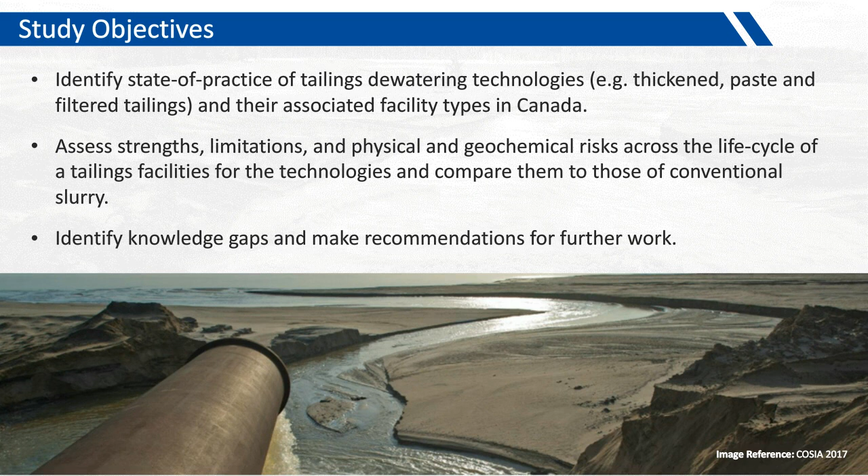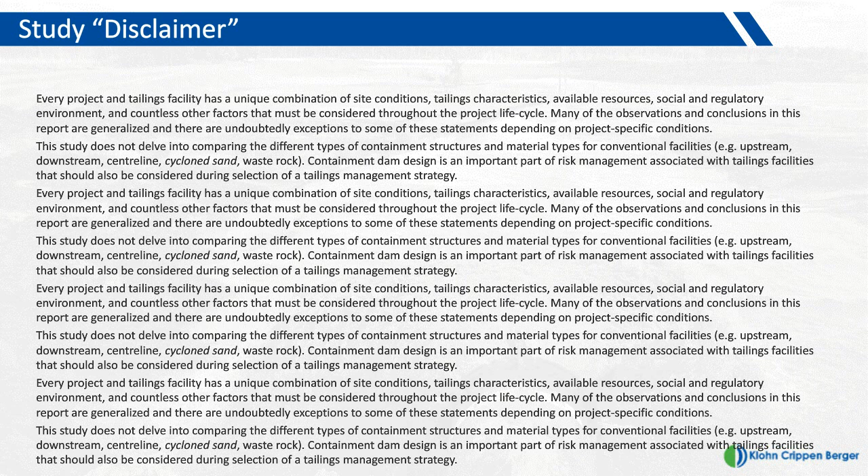As with all high-level studies, we have a long list of disclaimers, which really just boils down to: conclusions are generalized. Undoubtedly, there will be exceptions, and the scope of the study does not cover everything, in particular dam design and closure design that is unrelated to tailings dewatering. And we also are focusing on surface tailings facilities and not underground disposal of tailings.

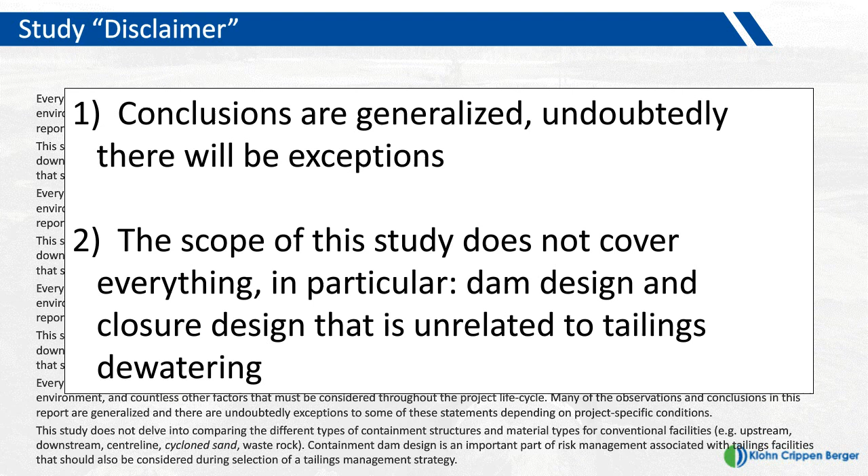The study methodology took 3 main steps. First, we are looking for the current state of practice in Canada, and we did that through literature review, database research, and a questionnaire to all Canadian mines. Then we looked at comparing the dewatering technologies and facility types and how they compared to conventional tailings management. And this third step was to identify lessons learned and knowledge gaps.

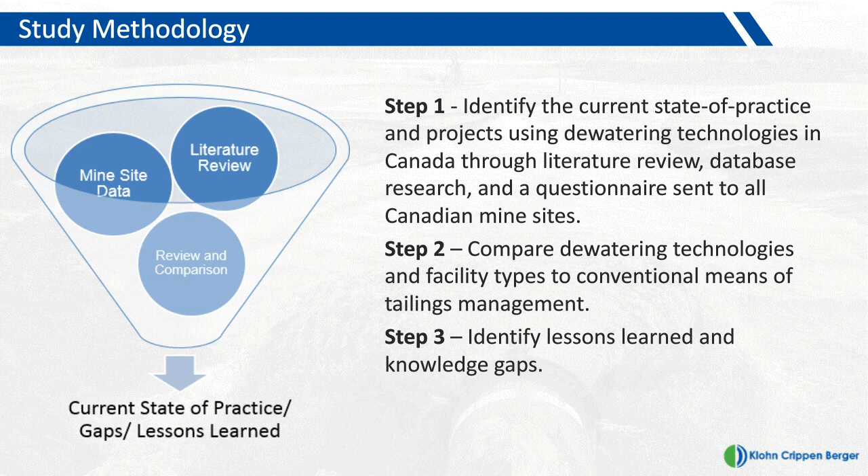No one-size-fits-all tailings technology for tailings management. Although this slide appears comical, it is an important concept from our study. Tailings management boils down to risk management and should be focused for the life cycle of the facility, especially post-closure. Tailings management strategy should be risk-based. Therefore, the tailings technology selected should consider the risk profile of all alternatives and implement the strategy that best manages all risks.

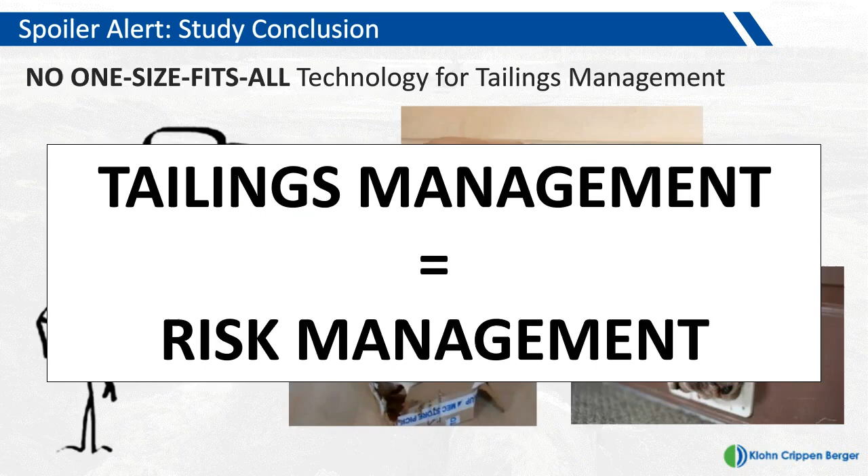Our presentation objective today is to give you a brief overview of the study and present our key learnings through the case histories. Now we're going to get into some of the details of the tailings management strategy considerations and what we uncovered during this study.

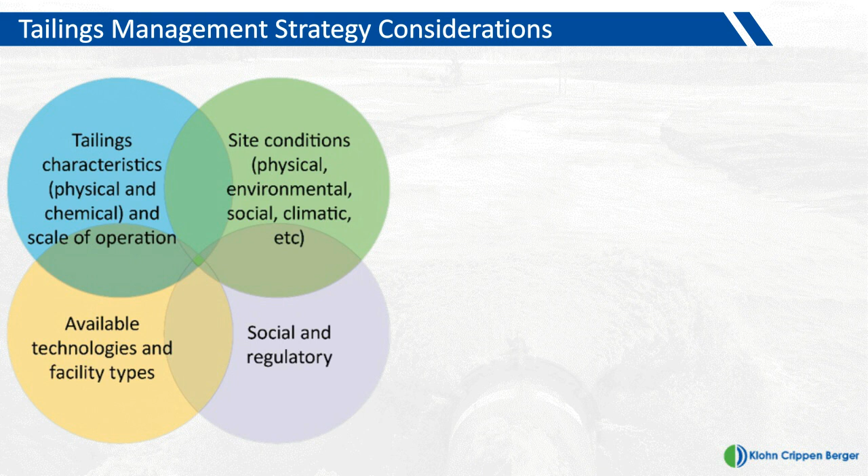We looked at tailings management strategies from 4 different perspectives: the tailings characteristics, the site conditions, the available technologies and facility types, and the social and regulatory environment. For this presentation, we're going to focus on 3 key areas: tailings characteristics and scale, available technology and facility types, and site conditions, which will encompass to some degree the social and regulatory environment of your site location.

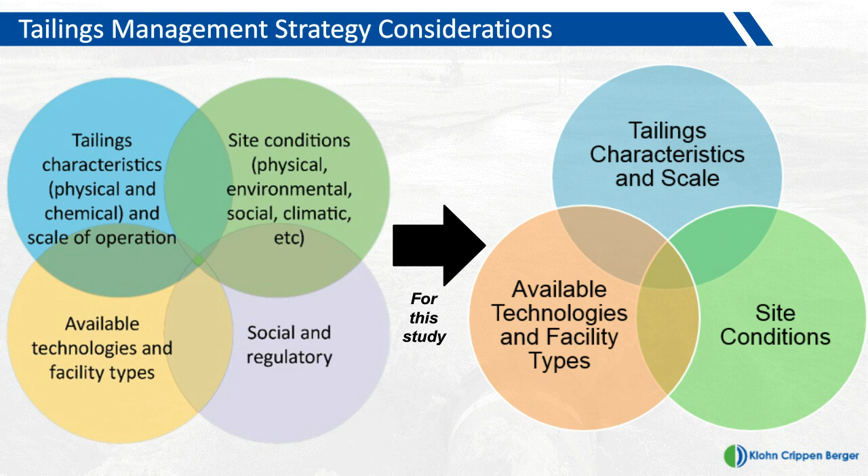You want to be somewhere in the middle of this Venn diagram. Your goal should be to minimize the short-term and long-term risks of the facility. All the key aspects should be evaluated: tailings characteristics, including both physical and chemical characteristics, what is available to you in your region, as well as the site conditions you're dealing with, and presumably the objective you're working towards for the tailings technology.

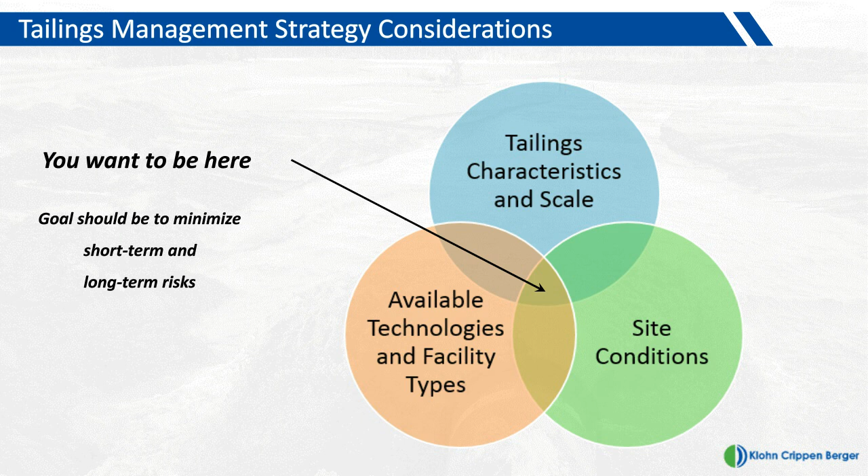When we start with characteristics and scale, we're going to talk a little bit about physical properties, so the grain size, the rheology and plasticity of the tailings, the chemical properties of both the solids and the water that you're containing in the tailings facility, and your mill production rate and anticipated throughput. Because as you'll see later in our presentation, not all available technologies are scalable.

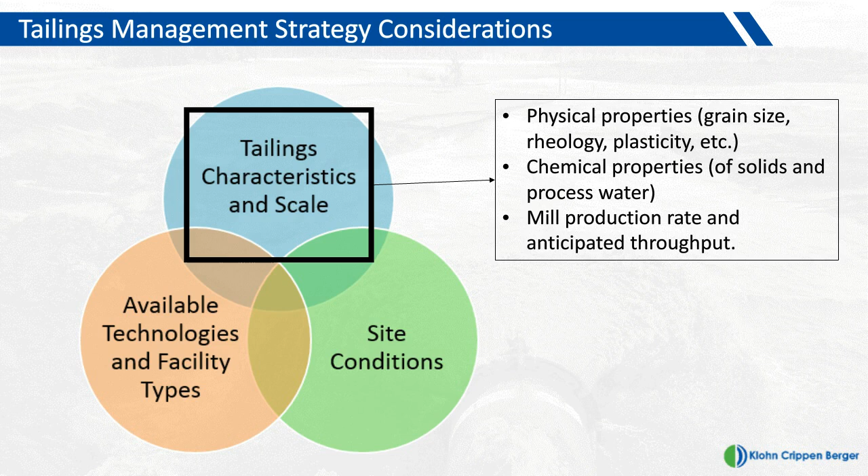Now I'm going to talk about physical tailings properties. What you're seeing on the slide here is the ICOLD 2017 classification system for tailings, and this is what we applied throughout the tailings technology study. The tailings are classified according to their particle size distribution and Atterberg limits. You'll see here we have several tailings types, ranging from coarse tailings to hard rock, altered rock, fine, and ultrafine tailings.

Iron and base metal tailings are typically characteristic of the coarse and hard rock tailings ranges. When we get into gold and polymetallic deposits, you can sometimes see them crossing the altered rock and fine tailings boundaries. When we talk about our case studies later, we'll get into some of the details for those specific studies and their tailings properties.

Kate's going to discuss tailings properties later on in the presentation as it relates to application to technology types. But here I want to emphasize the importance of tailings characteristics and classification prior to tailings technology selection. We're using this classification system for particle size and Atterberg limits, including the fines content of the tailings, the plasticity index, and the liquid limit to help understand whether or not your tailings are appropriate for different technologies.

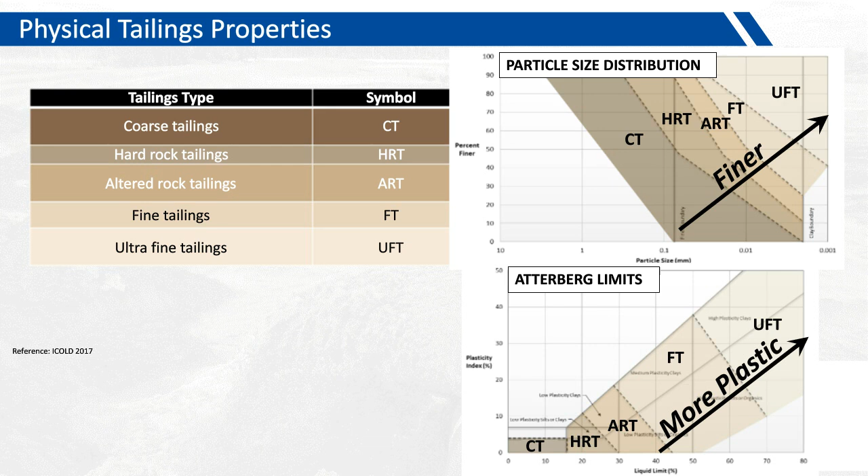When we consider the chemical properties of the tailings, I'm going to point you to the reference from the GARD Guide. This was developed by INAP in 2009, and it's a general classification and characterization program for the metal leaching and acid rock drainage properties of tailings and other geologic materials.

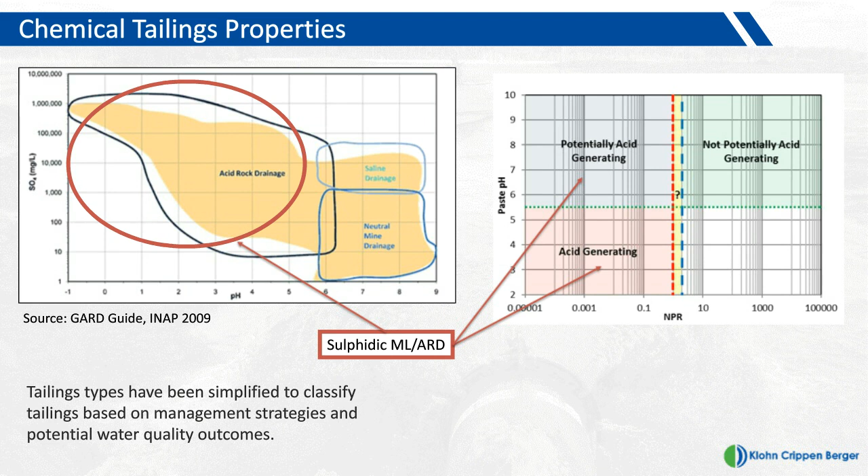The tailings type in the MEND study have been simplified to classify these tailings based on management strategies and potential water quality outcomes. Here we've classified the tailings based on their potential to generate acidity from sulfide oxidation processes. This is important when considering short and long-term management strategies for tailings and sulfide oxidation. This will help you understand whether or not you need to limit oxygen or water to your tailings pile during operations and closure, or perhaps both.

The next category is sulfidic processes that generate metal leaching. This is what we typically classify as neutral metal leaching, where we may not have acidity produced from the tailings, but we do have metals being liberated based on oxidation processes again. The third classification in the study report is non-sulfidic leaching.

So this is leaching processes that are not a result of sulfide oxidation and often include dissolution processes that occur. These types of tailings tend to need to be managed in consideration of water being contacted, not necessarily oxygen ingress into your tailings. Then we have low reactivity tailings.

Now these are the rare tailings type in the industry. However, there are several projects where the tailings do not produce significant levels of metals or acidity.

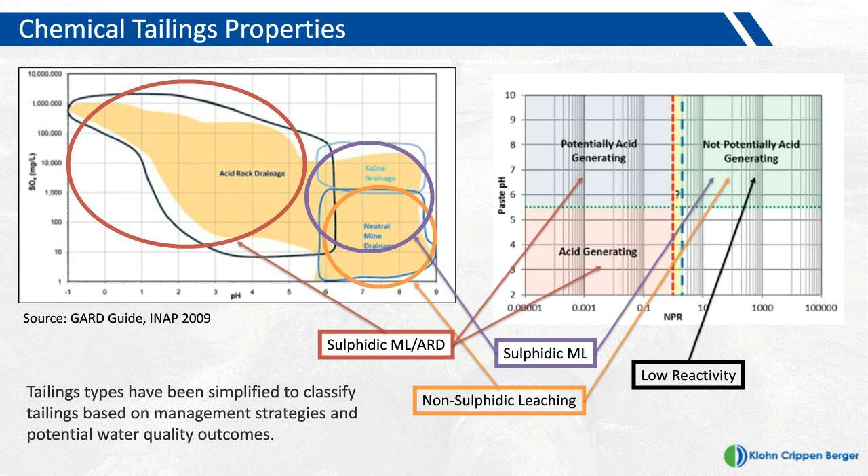When we're talking about tailings characteristics, there's obviously your tailings supernatant quality. So what process reagents are you using, and how does that need to factor into your tailings water management? What treatment is needed for this site? What is your tailings settling time going to look like? What's the mill production rate? How scalable is the technology? And how effective is this technology overall for your type of material?

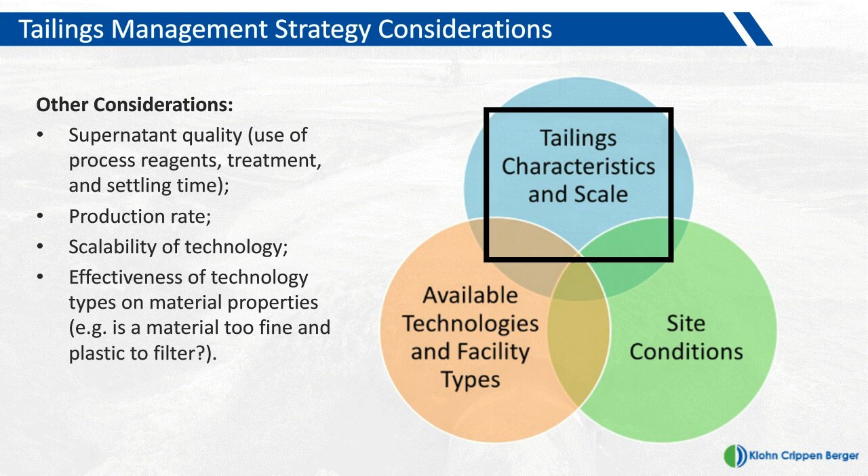Next, we're going to talk about the available technologies and facility types that we looked at, and our framework for classifying dewatered technologies and facilities.

They are presented on this graph. Along the bottom, we have different states of dewatering technologies, representing tailings from unthickened, thickened, high-density thickened, paste, and filtered. The difference between these is really the solids content by weight - how much water has been removed from the initial slurry. As you can see, unthickened acts like water, and as you move forward and take out more and more water, the tailings act like a solid.

Along the y-axis of the graph is yield strength, or stress. Yield strength or stress is defined as the amount of force required to make a fluid flow. So as you can see, the percent solids content along the bottom is related to the yield strength it has, hence the name paste - it acts like a paste.

Along the top, we have our facility types, which Lindsay will go into further. We have conventional, where you are storing typically unthickened or thickened tailings. We have a thickened or paste type facility, where you would store high-density thickened or paste tailings, and then a filtered facility, or pile, where we would store filtered tailings. The difference between these we will go through as we introduce each facility type, but they will always differ in process, transportation, deposition, and how the tailings act within the facility.

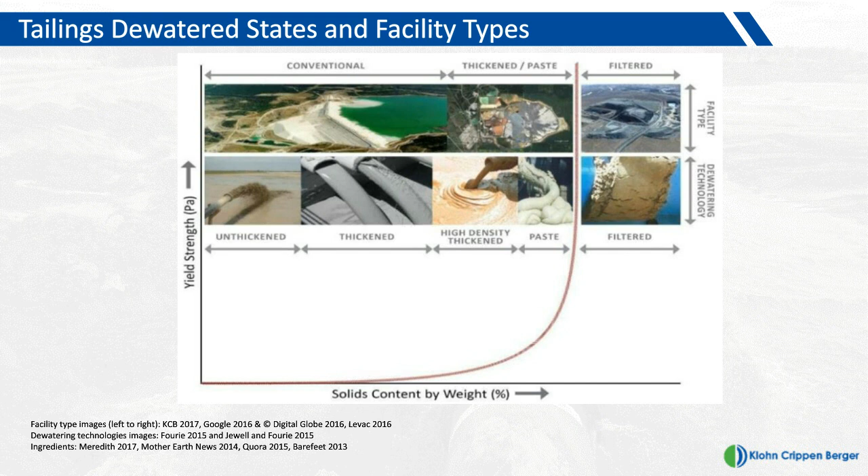Starting out with a conventional facility, this is obviously the most popular tailings facility type within Canada. It's what we've been using historically. There's a lot of advantages to a conventional tailings facility and tailings dam construction.

For instance, the ability to use tailings in construction or cyclone tailings sands for dam construction. These facilities often have large ponds within the facility itself to help with water storage and water reclaim, as well as storm attenuation. And it's the type of facility that we're most familiar with.

Now, most of the water management here occurs behind the tailings dam itself, which is one of the key risk items that was discussed as part of the initiation of this study. If we want to manage our water more effectively behind the tailings dam, the conventional facility doesn't necessarily allow us to decrease the water volume stored.

One of the benefits to this facility type, however, is that we can progressively reclaim on the downstream slopes, and we have a sufficient amount of water being able to be returned to the mill. There's also a lot of benefits to long-term closure when we talk about chemical stability, and sulfidic metal leaching and acid rock drainage, where a water cover in the long term can help with closure water quality management.

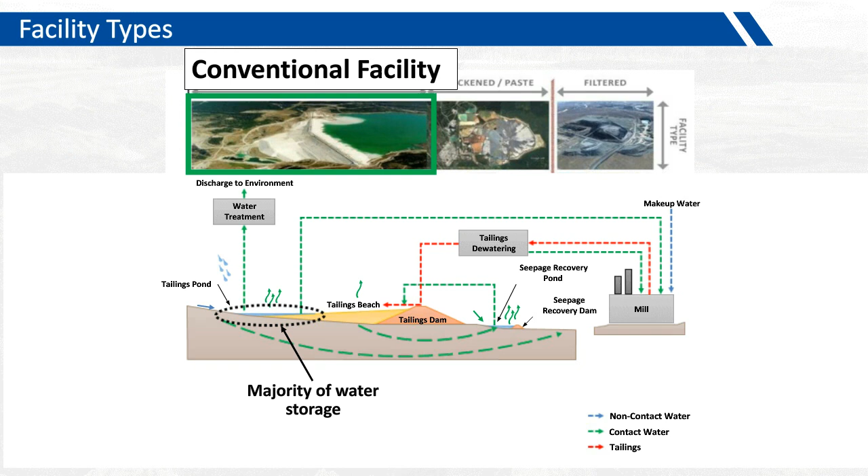There are some challenges with conventional tailings facilities, which is why we evaluate the thickened and paste facility type as part of this assessment. You'll notice the biggest difference with the thickened and paste facility is the majority of water is managed outside of the tailings dam. Now this doesn't necessarily minimize the amount of water that needs to be stored in the facility or managed as part of the tailings - it just changes the location that this water is managed.

Now this is seen to be beneficial when we talk about risk management in tailings because we're not looking at a potentially large volume of tailings being released during a dam break scenario. One of the challenges, though, with thickened and paste facilities is they tend to take up a larger surface area depending on the overall design.

Some of the paste facilities that we reviewed did have a larger surface area, and so we actually had a lot more water that needed to be managed because of the catchment size.

Another challenge with this thickened paste approach is that typically it can be challenging to achieve the appropriate tailings properties for the facility type to be effective. People typically get about 5% less in their tailings densities than what is designed for.

In this facility type, you may require positive displacement pumps for transportation, which can add to logistical challenges and costs for the facility overall. These facilities typically, especially when we're talking about a paste cone, cannot be progressively reclaimed, and so we're looking at closure after the fact.

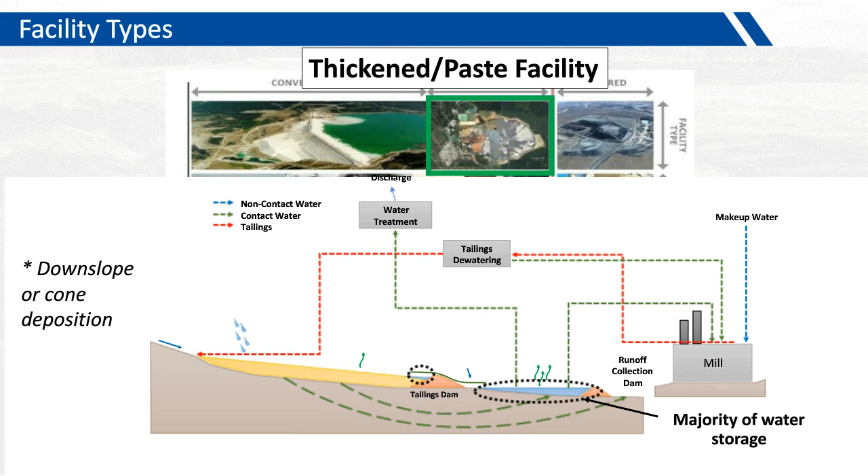When we look at a similar configuration set up for the filtered facility, you'll see again that the majority of water storage occurs outside of the tailings pile itself.

The best practice with a filtered tailings pile is to have a structural zone on the outside that acts like a dam. For the filtered tailings pile, there's generally low seepage rates, with seepage coming from infiltration and not a standing pond. There will be some runoff from the facility that will generally need to be managed as contact water, depending on the geochemical characteristics of the pile.

With the external water storage, the pond will need to be sized to manage not only your storm events or contact water runoff from the facility, but also enough water to handle your water reclaim for the mill circuit.

With a filtered tailings pile, you can have progressive rehabilitation and control over the surface configuration, which can be helpful. These as well can have a much smaller footprint than a conventional tailings facility or a high-density thickened or paste facility. However, that is entirely dependent on the design of the facility itself.

There tends to be a low phreatic surface in the tailings pile, which again is beneficial for water management, but may not be beneficial for geochemical management.

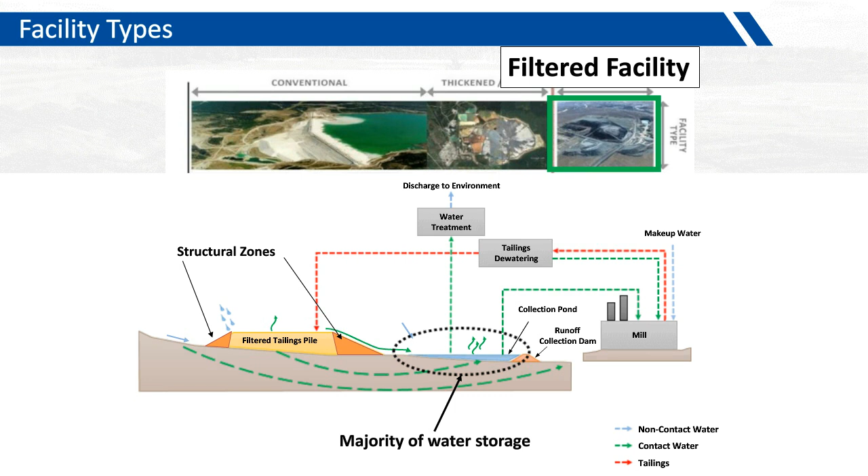Long-term closure of filtered tailings facilities isn't well documented yet, and so the management of geochemical processes and effluent in the long term or closure of these facilities has yet to be developed in detail.

Next, I will briefly touch on the relationship between tailings properties and available technologies, facility types, and some considerations.

Depending on the objectives of your tailings management strategy and facility type, there will be design targets for dewatering equipment. For example, the design of a high-density or paste facility may require that tailings be dewatered to a solids content such that the tailings release little to no water upon deposition, exhibit non-segregating behavior, have a low hydraulic conductivity and high moisture content, and deposit in steeper slopes.

However, to achieve these tailings properties, the tailings need to be dewatered to a high enough solids content, referred to as a design target. Case studies have shown that oftentimes mines can struggle to get their equipment to ramp up to the design targets in a timely manner, if they achieve them at all.

Also, even if the solids content design target is achieved, the properties of the tailings may have been overestimated, for example, the tailings deposition slopes. Typically, high-density thickened tailings deposition slopes are steep for a short distance, then flatten out to similar slopes as unthickened tailings.

Similar with filtered tailings, as Lindsay mentioned, it is good practice to include a structural zone in a filtered tailings facility. The structural zone should be dilatant. In order to achieve dilatancy, the tailings need to be compacted close to the optimum moisture content.

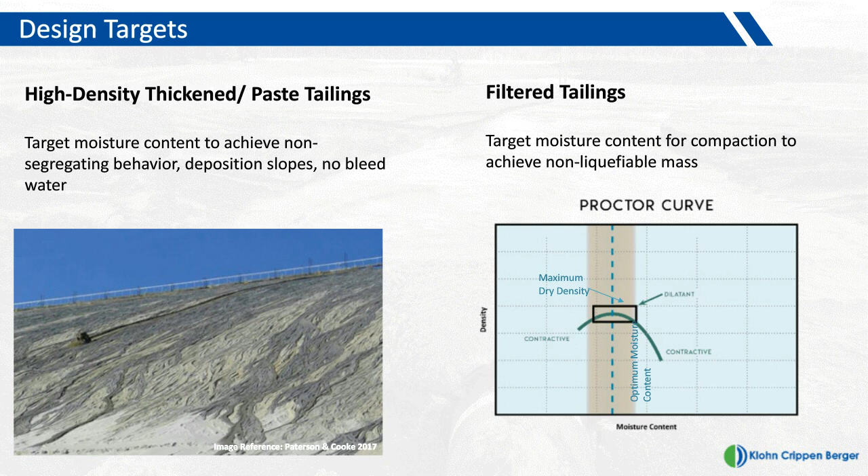How easy is it to dewater tailings? Well, that depends on the property of the tailings. As you can see here, this is our physical classification of the tailings on our yield stress and solids content graph. This shows us that the coarser the tailings with less fines content, the easier it is to dewater those tailings.

The finer the tailings, for example, the ultra-fine tailings types, like mature fine tailings from the oil sands, those can be very, very difficult to dewater to high solids content before you have high yield stress. With high yield stress comes limitations with the equipment and transportation.

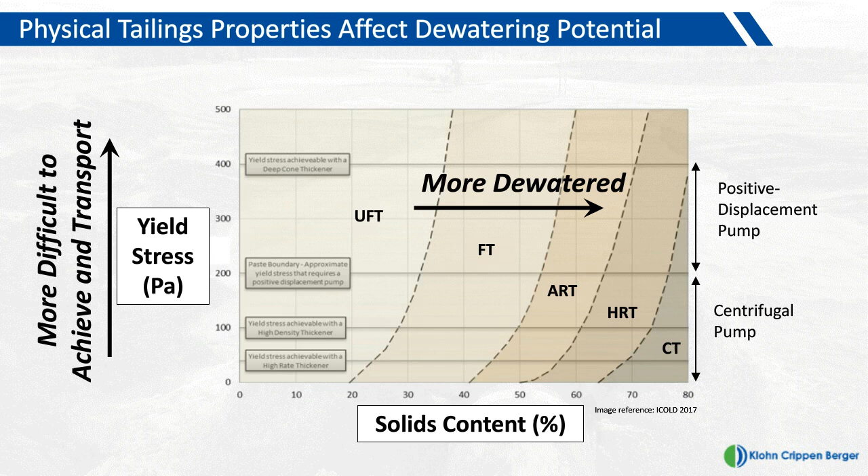Next, we're going to talk about how the tailings characteristics and scale of the facility fit in with the site conditions. We're going to do this by looking at a relationship between the climate and production scale of existing facility types in Canada and worldwide.

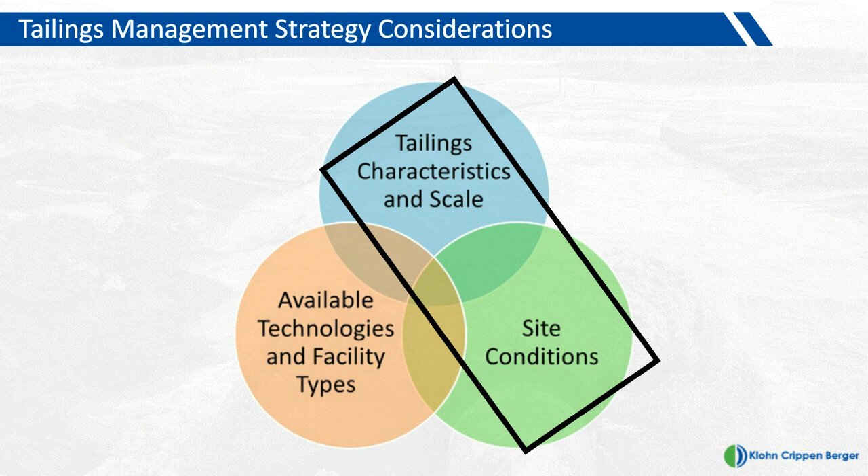When we look at conventional tailings facilities, where we're talking about typical percent solids ranging from 20 to 40%, we see these types of facilities span a very broad spectrum of climate, from a net negative water balance of minus 3,000 millimeters to a net positive water balance of plus 2,000 millimeters per year, and a tailings production rate from as low as 500 to 1,000 tons per day up to approximately 175,000 tons per day. Conventional tailings have been broadly applied in Canada and internationally, and I'll note that these dots represent all projects studied, not just the Canadian projects.

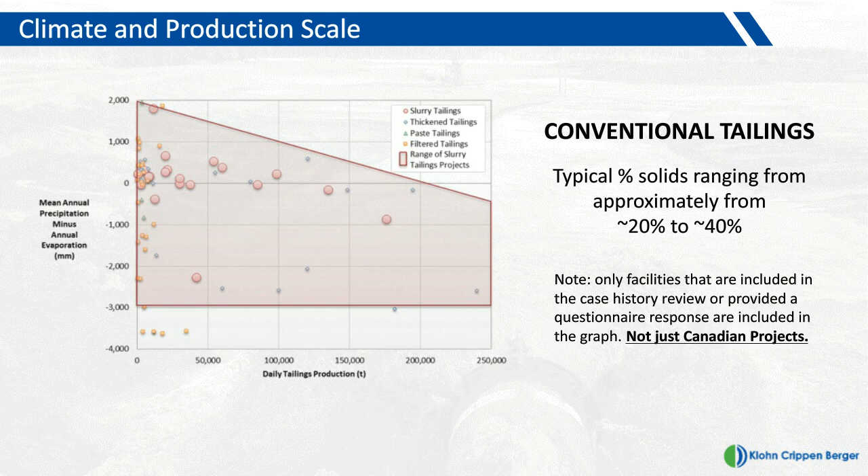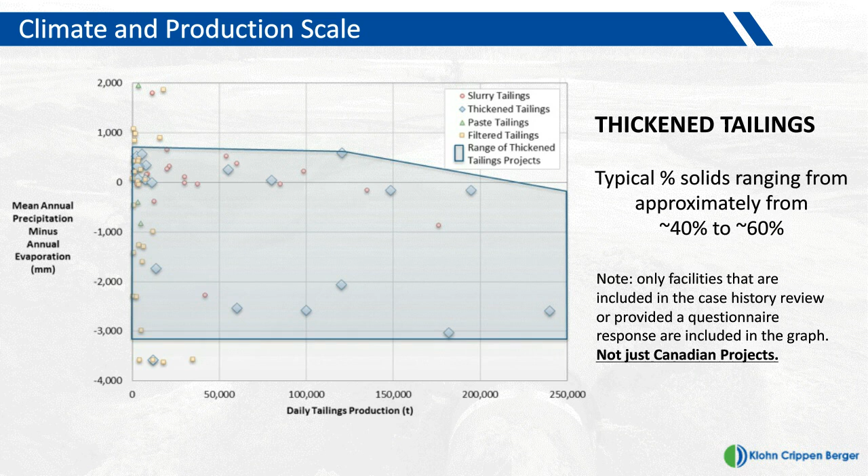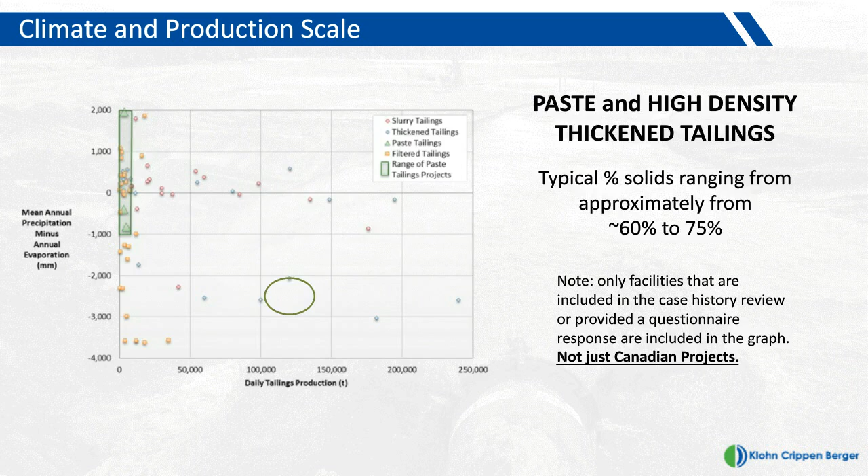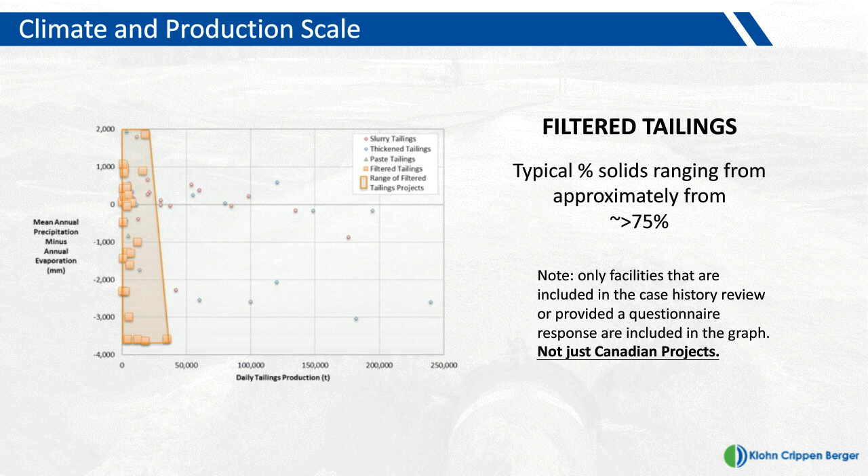We are now going to jump into some of the case histories and provide some lessons learned for those.

The information for the case history database was collected through a variety of ways. First, we sent a questionnaire to over 260 mining companies requesting information on their tailings management strategies and tailings properties. We had 36 replies. We then supplemented this by looking in KCB's library and previous project files, and did a literature search conducted by KCB's professional librarian. We also contacted mining companies directly when we needed further information, and our mining company clients. We also looked at associations we're part of, including the International Commission on Large Dams, the Mining Association of Canada, and the Canadian Dam Association. And of course, we contacted the provincial, territorial, and federal government agencies to make sure we identified all the projects that we could.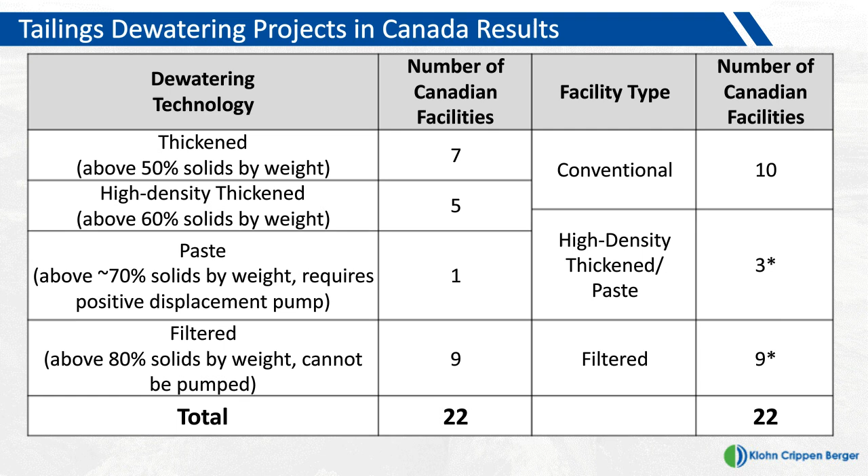We're going to dig into some details on some of these facilities that have implemented dewatering technologies, why they've done it, and what the benefit and challenges have been. We're going to start here with Canadian Malartic.

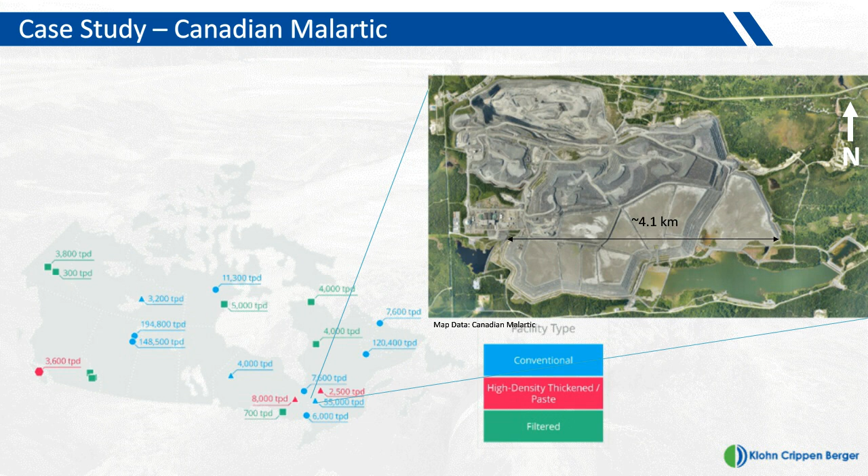This is a conventional tailings facility that has implemented thickened tailings at a production rate of approximately 55,000 tons per day. Malartic Tailings Facility is located in Val-d'Or, Quebec, an open-pit gold mine, with 64 to 65% solids deposited in this conventional facility. The climate has a net positive water balance and experiences snow cover in winter. This mine has been operating since 2011.

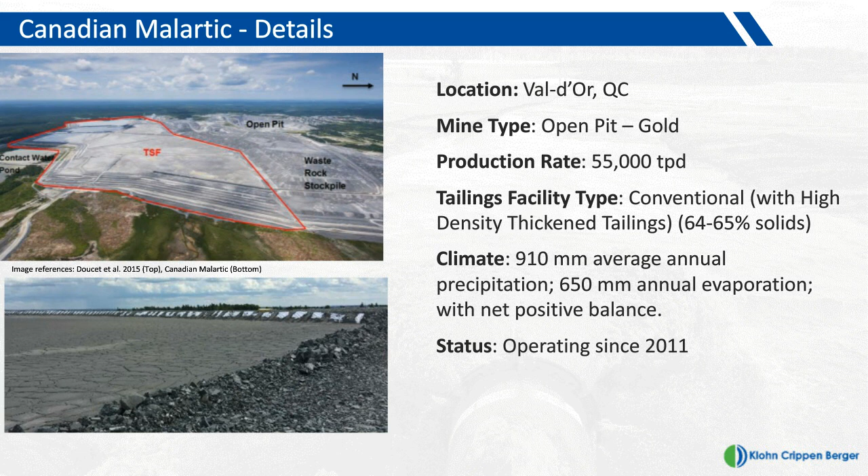Canadian Malartic dewatering is generally done outside the facility. The supernatant and runoff water reports to the reclaim pond located southeast of the facility. There's an internal overflow spillway near the center of the south and central perimeter dikes. The supernatant and runoff is 100% recycled to their process plant.

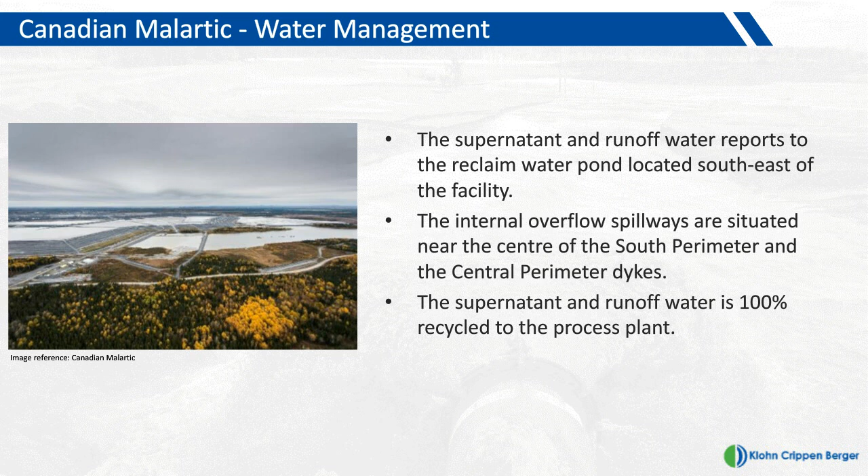The tailings at Canadian Malartic mine are along the boundary between hard and altered rock tailings. Cyanide is used in the process, and according to the classification scheme in Directive 019, a significant proportion of the ore, waste rock, and tailings are potentially acid generating or leachable, falling along the sulfidic, metal leaching, and acid rock generating scale of tailings properties.

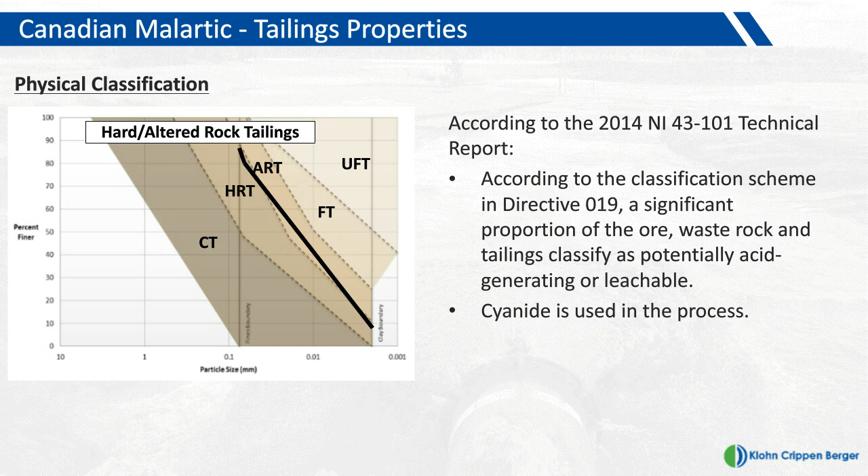So why did Canadian Malartic decide to go with thickened tailings technology? The primary driver was dam safety and limiting water storage on site. Thickened tailings also reduces the need for containment structures, reduces the footprint of the tailings facility, and improves water recovery—they reclaim 100% of the effluent and runoff from their tailings to the mill process. They're also using the tailings here to cover old, potentially acid-generating tailings.

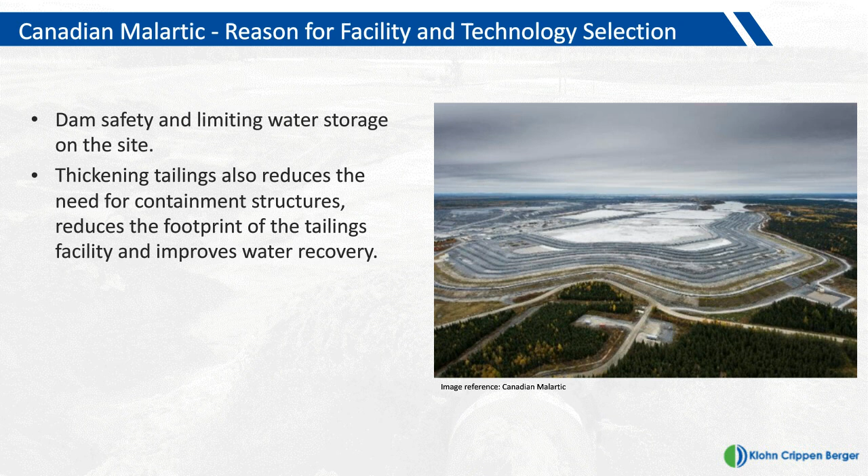So why did this tailings technology work for Canadian Malartic? It worked because they invested time and money in continuous improvement towards meeting their tailings solids content targets. They had flexibility in the tailings facility type, since they're depositing in a conventional facility, and flexibility in the tailings solids content deposited.

They already had an external water management system set up for managing runoff and effluent from the facility. The challenges were that it took considerable time to meet their thickened tailings design targets, as the tailings processing methodology wasn't achieving the design. However, the flexibility in the tailings facility type helped mitigate that challenge.

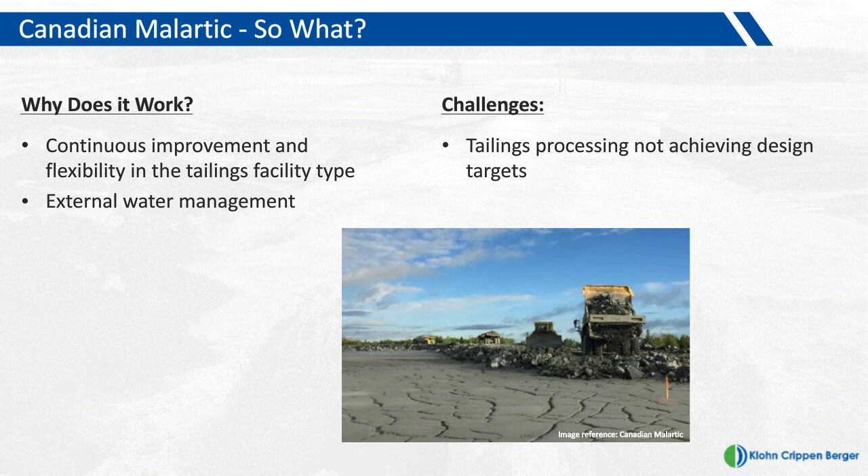The Musselwhite Mine is located 475 kilometers north of Thunder Bay, Ontario. It's an underground gold mine that produces tailings at approximately 4,000 tons per day. Similar to Canadian Malartic, this facility deposits thickened tailings in a conventional facility and experiences a net positive water balance with seasonal snowpack.

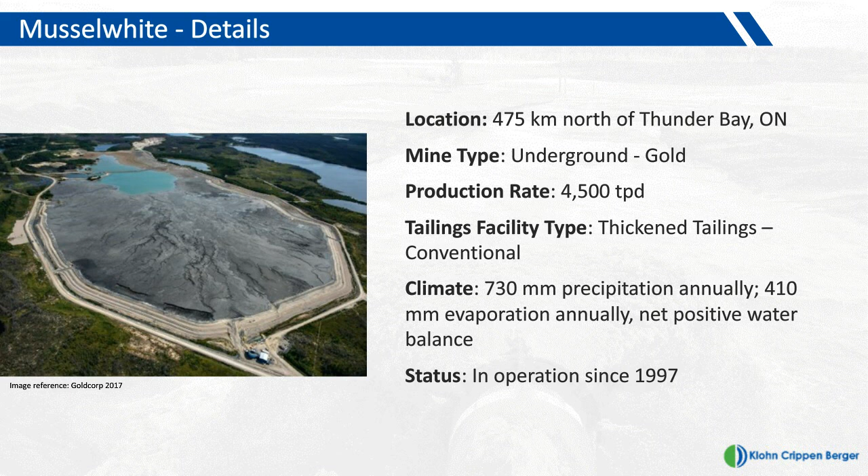The Musselwhite Mine has been in operation since 1997. The tailings properties at Musselwhite are along the hard rock tailings boundary. The slurry is dewatered from 50% solids content by weight to approximately 68% solids content. The deposited tailings have a concave beach slope profile, with slopes as high as 3 to 4% near the spigots, decreasing to approximately 2% toward the center of the facility.

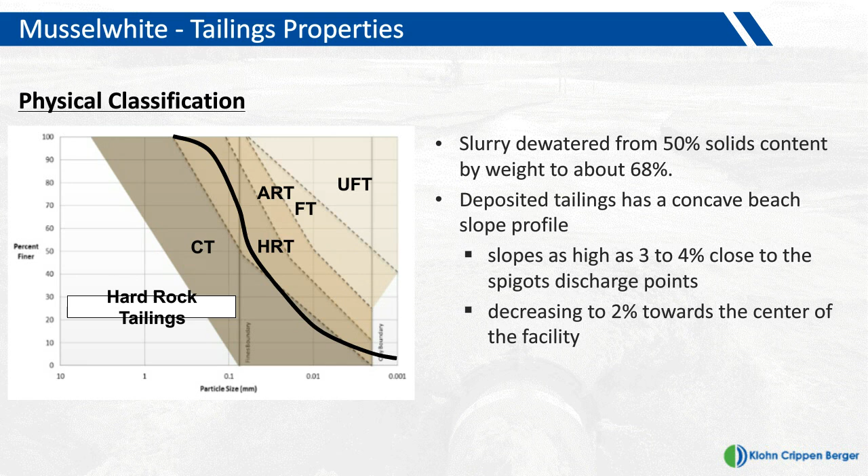Classification of these tailings is somewhere between potentially acid generating, uncertain, and non-potentially acid generating. It has a low to moderate sulfide content, up to 2%, with longer lag times to acid generation in the greater than 5-year range. Water treatment is employed at this site for water discharge to the environment as well.

So why did Musselwhite Mine adopt this technology? They adopted it to increase capacity of their existing facility by stacking thickened tailings layers over their existing conventional tailings. This changed their closure concept from a wet cover to a dry cover for final closure. It was more desirable from a community perspective, as this strategy allowed the mine to maintain the same footprint, minimize long-term seepage impacts, and align with future progressive reclamation plans.

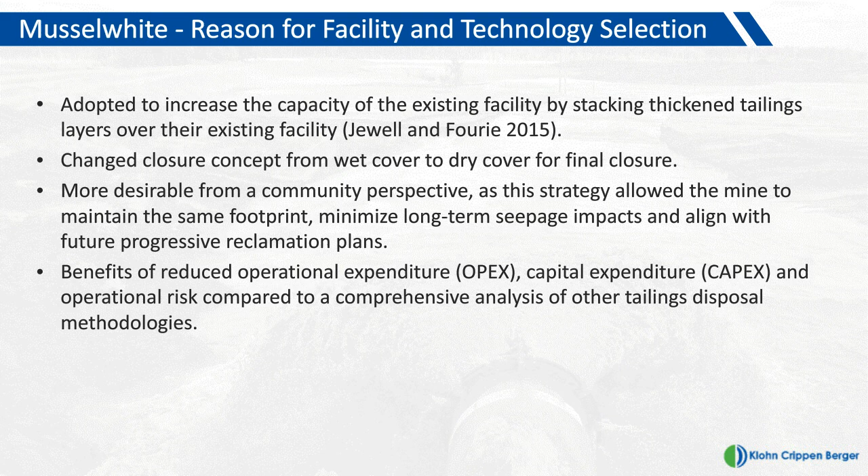The benefits of this approach were reduced operational expenditure, reduced capital expenditure, and reduced operational risk compared to a comprehensive analysis of other tailings disposal methodologies. They changed to thickened tailings in 2010, having started operating in 1997, so Musselwhite had the benefit of knowing the material properties of their tailings prior to technology implementation, and also having a large volume of material available for testing.

One of the challenges for new mine projects evaluating tailings technology types is that there often isn't a large volume of tailings available for proving out the technology on those specific tailings types. Other challenges were dust management of the facility and changing the closure design approach, integrating it with the rest of the mine closure plan.

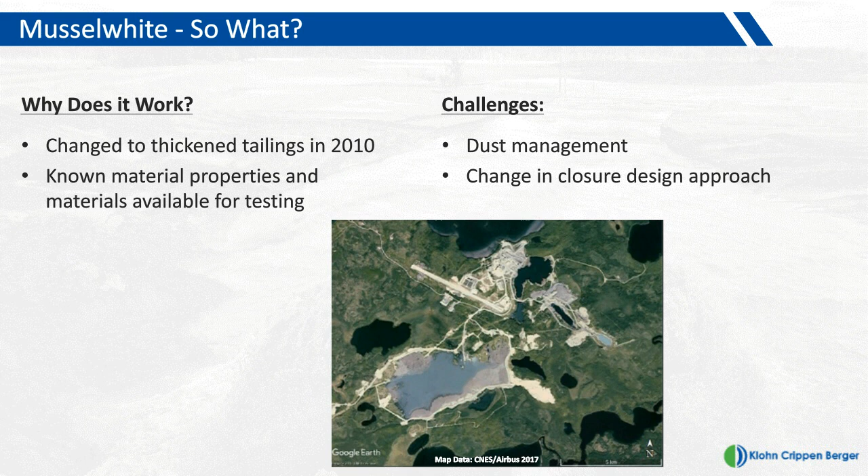Next, we're going to talk about Greens Creek. The Greens Creek Mine and Tailings Facility is not located in Canada, although we felt it was a good example to discuss because it was mentioned in the Mount Polley Review Panel report.

The Greens Creek Underground Mine and Filtered Tailings Facility is located on an island 30 kilometers southwest of Juneau, Alaska. The mine produces roughly 2,000 tons per day of tailings. However, some of the tailings are used as underground backfill, and the remaining are filtered and placed in the surface tailings facility. The tailings facility is located in a high precipitation environment, with roughly half the precipitation falling as snow.

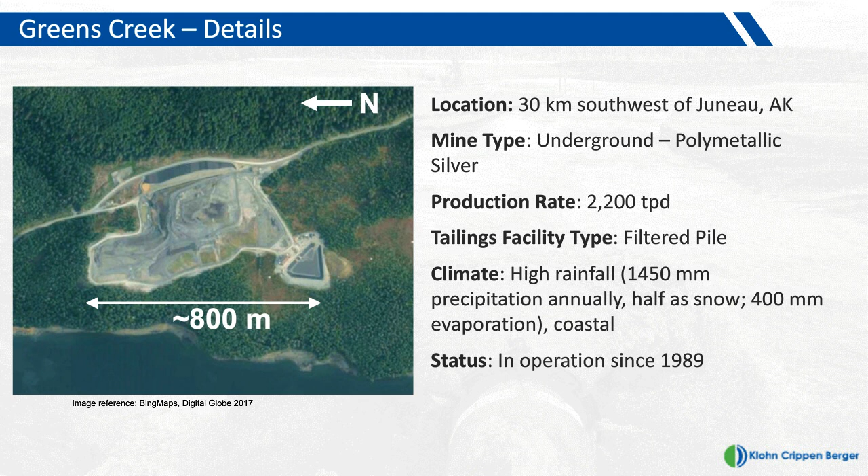The physical classification of the Greens Creek tailings is hard rock tailings. The tailings do have the potential for metal leaching, however the lag time is very long. Now I will walk through the key elements of the Greens Creek Filtered Tailings Facility.

The tailings are filtered and trucked over 10 kilometers to the tailings facility, where they are spread and compacted. The haul trucks travel on temporary rock roads within the pile. However, these roads are not trafficable during high rainfall events.

The tailings are placed on a geomembrane liner for seepage control. Surface water runoff and seepage are directed to water management ponds, where it is treated prior to discharge. The pile slopes require temporary or permanent covers to control erosion. Still, there are some fines that need to be managed within the water management ponds.

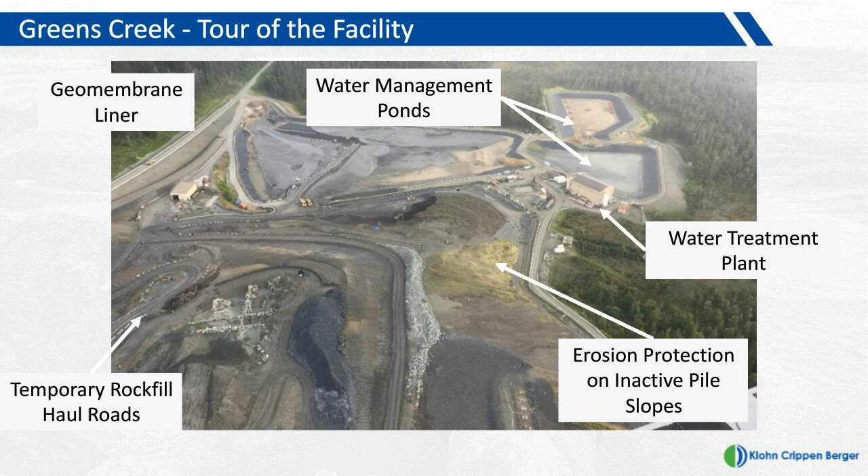So why did they pick this technology for the Greens Creek mine? Filtered tailings was adopted to minimize the overall footprint. For the site that they had, the topography was such that it was easier to put in a filtered tailings pile rather than build a dam.

Because there's no pond on the tailings surface, there is little potential for the tailings to be mobilized and transported during a seismic event as well.

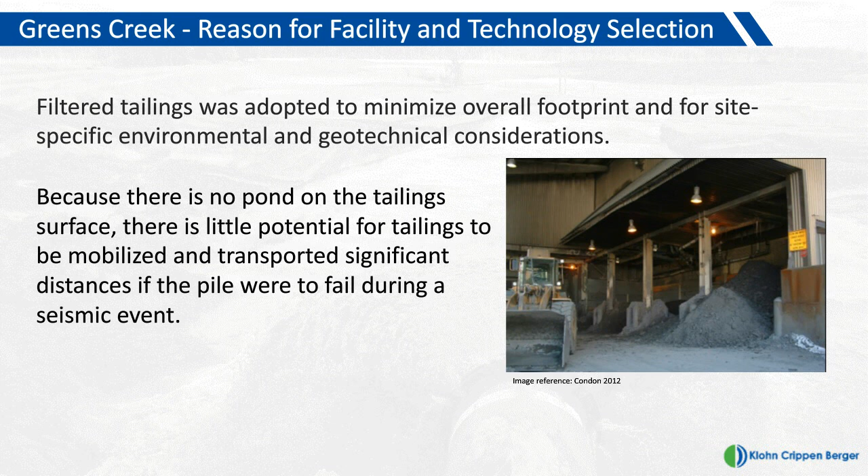Why does this work? It works because the material properties of the tailings are coarse enough that the filtering is reasonable. Site conditions are conducive to the cost balance for filtered tailings. There's a low production rate, and then there's backup storage options. For example, they can send the tailings underground, and they also have a storage shed that they can use for a couple of days if needed.

The challenges with the site are that the tailings pile does have trafficability issues during high rainfall events. There is water and erosion management that needs to be done, and there's a requirement for water treatment.

We'll talk about the Raglan mine. The Raglan mine is an underground nickel-copper mine located in the Nunavik region of Quebec. The mine produces roughly 4,000 tons per day of tailings.

The tailings are filtered and placed in a filtered tailings facility. The climate is a low precipitation and cold climate. The physical classification of the Raglan mine tailings is hard rock tailings that are filtered to approximately 18 to 20% moisture content. The tailings do contain up to 8% sulfides, and they do generate acidic runoff, which requires water treatment.

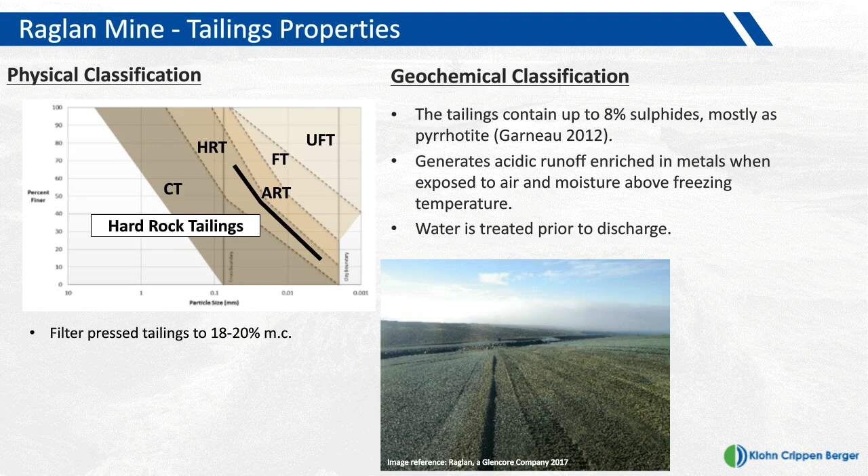So why did Raglan Mine adopt filtered tailings technology? The reason is economic and water management related. The Raglan Mine is located in a region that doesn't have suitable borrow material for dam construction and also has limited water availability. Therefore, the cost-benefit trade-off between going to filtered tailings or a conventional facility was such that filtered tailings was more economic and a better way to manage the water.

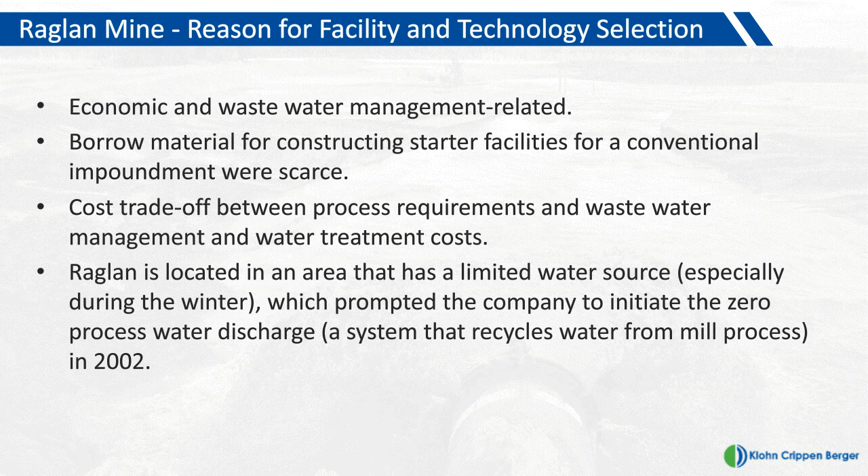So why does filtered tailings work for the Raglan Mine? It works because of economics and water management considerations, as I just discussed, and it also works because of the low production rate and suitable tailings properties for the mine. The key challenges will be doing closure planning that accounts for climate change and the geochemical properties of the tailings.

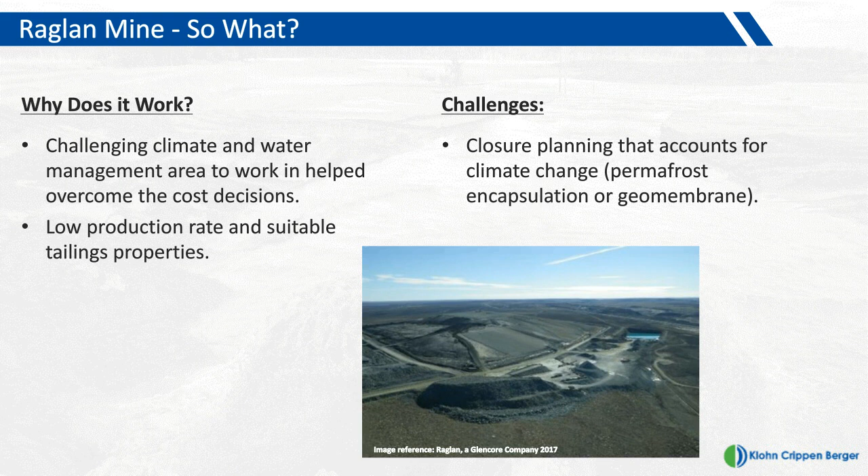We're now going to highlight some of the conclusions from the case study evaluation, as well as the information received as part of the overall tailings study. So what have we learned?

The tailings physical properties need to be suitable for the technology selection, and testing prior to technology implementation should be comprehensive at the planning and trade-off stages. This testing should include both physical and chemical properties of your tailings.

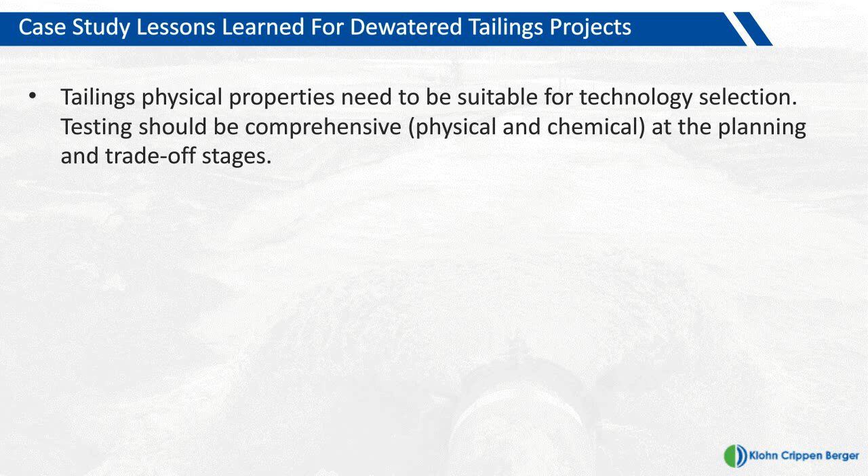Achieving the design targets, the solids content, and the slopes of the facility can be challenging during startup and operations. Continuous effort and investment is required for tailings technology implementation.

There needs to be some allowance for operational upsets, including backup storage, as discussed as part of the Greens Creek Mine case study.

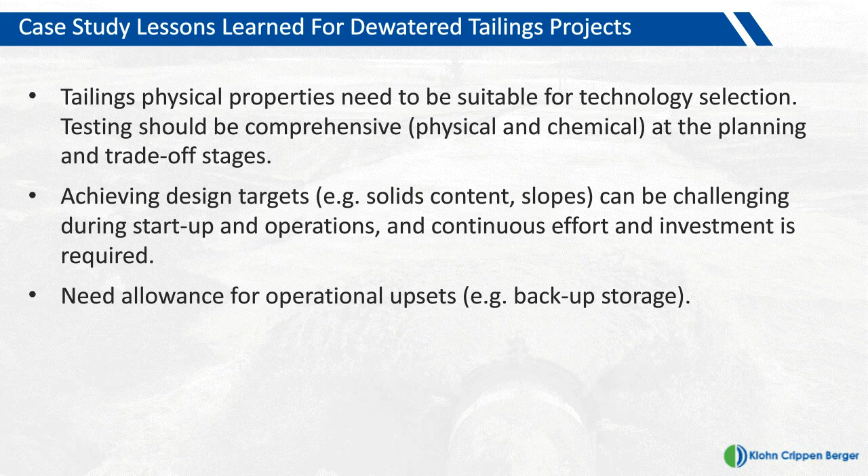The most important point, water management cannot be avoided. You're just changing the location at which you manage most of your water.

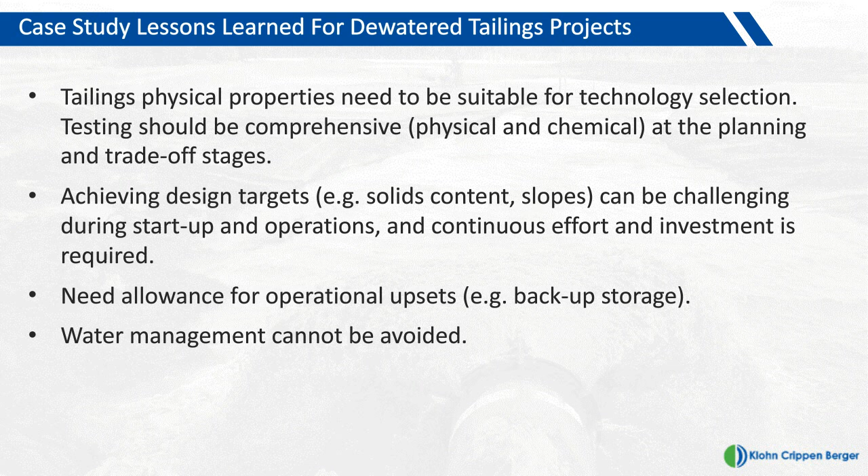More work is required to evaluate the relationship between the geochemical properties and a dewatered facility's closure plan. We need to share more information as an industry to progress.

Dewatered tailings are not widely applied in Canada. The dewater projects reviewed as part of the study have been implemented with variable success rates, ranging from quite successful to not successful.

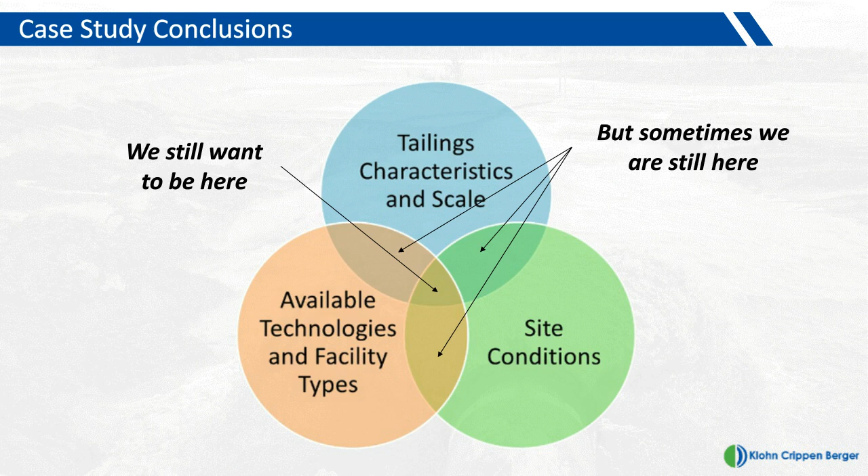In conclusion, when selecting a tailings management strategy, you need to consider the tailings properties and site conditions, and the overall risk profile for all available alternatives.

Dewatering technologies and associated facilities may provide potential benefits for some cases, but they need to be reviewed holistically and on a risk-based approach when deciding on a tailings management strategy.

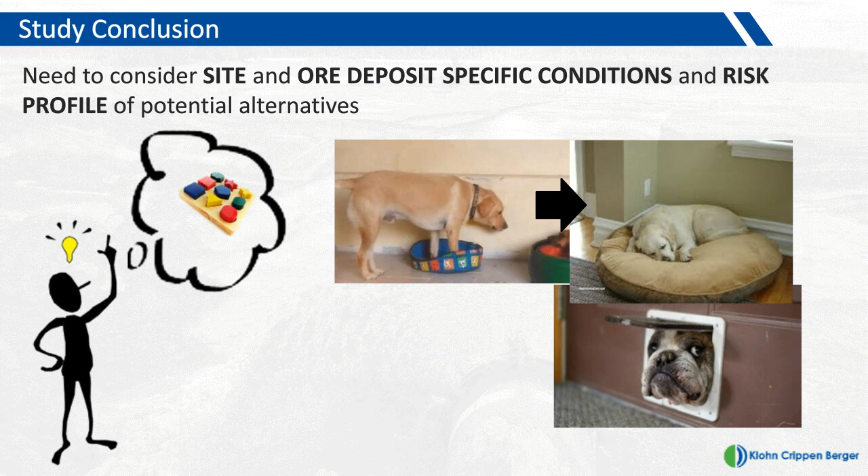To date, there has not been one technology that solves all tailings management problems. There is not even one technology that is better than all the rest. There is no one-size-fits-all. Dewatering technologies are not a replacement for design, operation, and closure best practices.

Therefore, a risk-based approach to tailings management should be used to select the best strategy, and best practices should be implemented in design, operation, and closure.